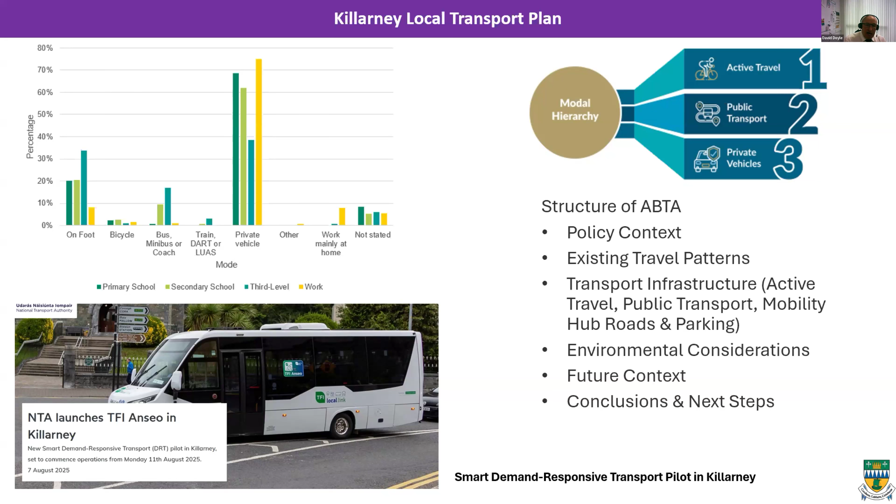So all these will help address the traffic congestion in the town and make the town more active travel friendly. The scheme we just developed last year is the Rock Road scheme, linking from the N22 and the Tralee approach down to the town centre in Killarney.

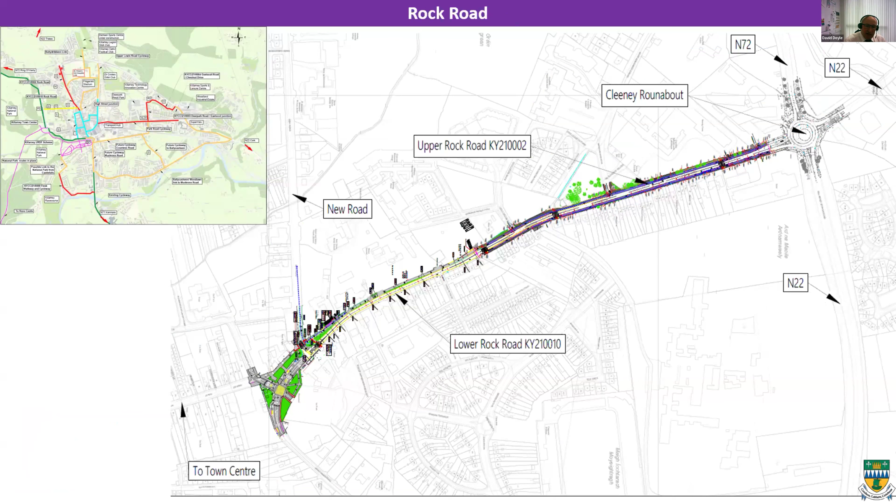It's 460 metres of segregated cycle lanes for the northern part, and then it links over to a combined shared cycle space with junction upgrades at the New Road, Rock Road junction.

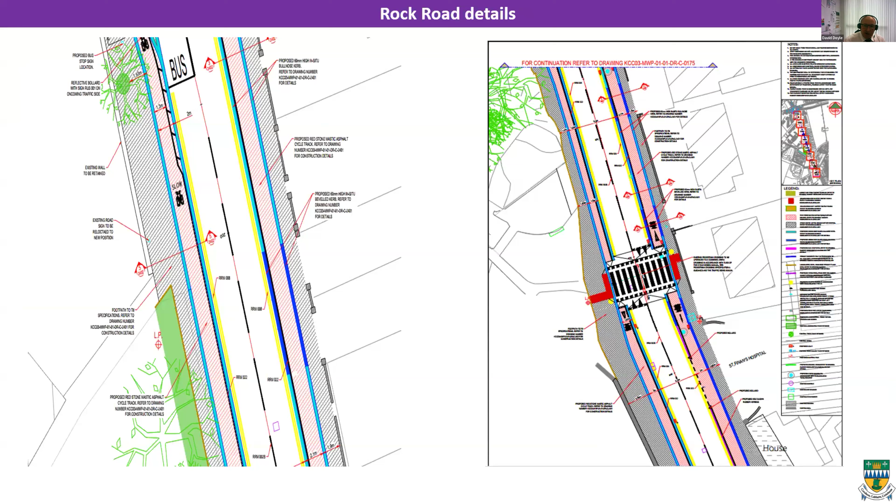The scheme entails two-metre wide cycle lanes on the segregated section heading north-south, with improved footpaths and landscaping, new street lighting, and fully segregated facilities. We also introduced 3 raised pedestrian crossings to provide safe crossings for active travel users, which also benefits significantly with speed reduction, which I'll come to in a while.

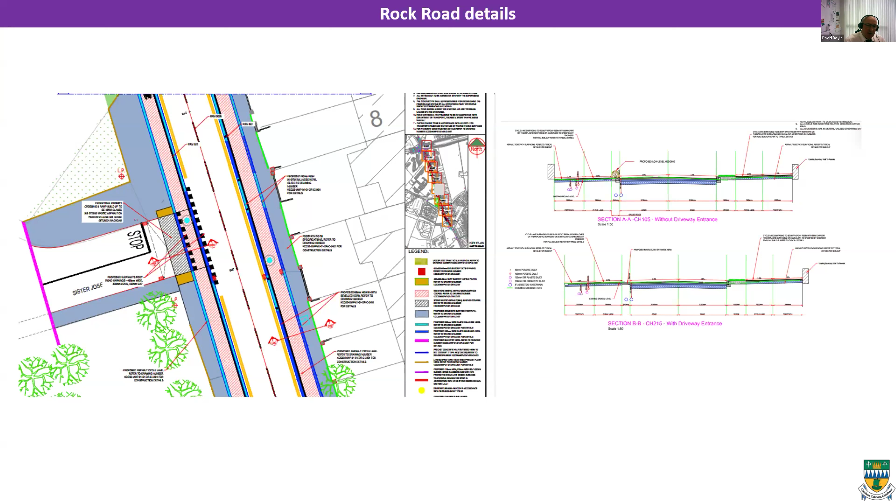Again, 2 metre segregated cycle lanes, with the carriageway reduced down to 6.5 metres. We also accommodated the bus stops - these are 2 online bus stops, all detailed.

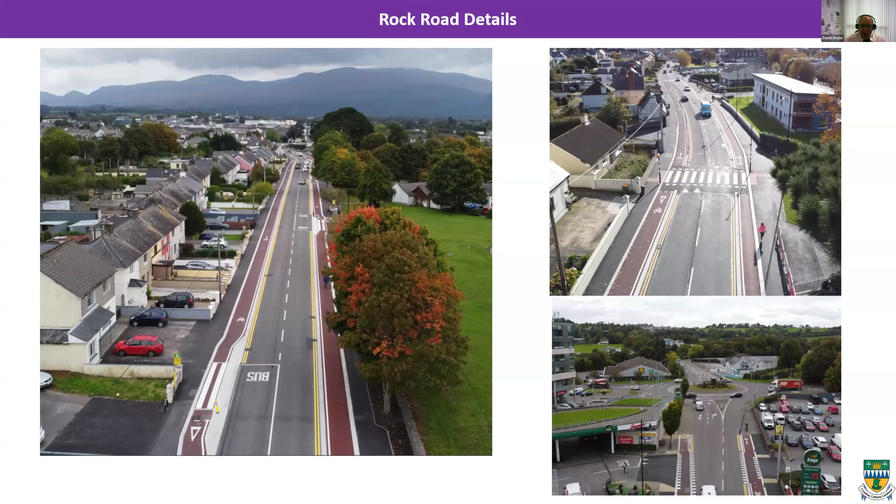On the photograph on the right, you can see the raised pedestrian crossing, and where the scheme ends linking in for the N22 Killarney bypass at the northern end of town. My colleague Paul Curry, working with the TII, has a scheme developed to convert that junction to a protected junction with cycle lanes heading northward to the housing and play areas north of this area.

Photographs during the works - with the curbing in place, which delineates the traffic area from the cycle lane. There's a 60 millimetre level difference between the cycle lane and the footpath. You can see the various stages with curbing installation, the road base, and the red cycling surfacing, which clearly defines the cycling infrastructure.

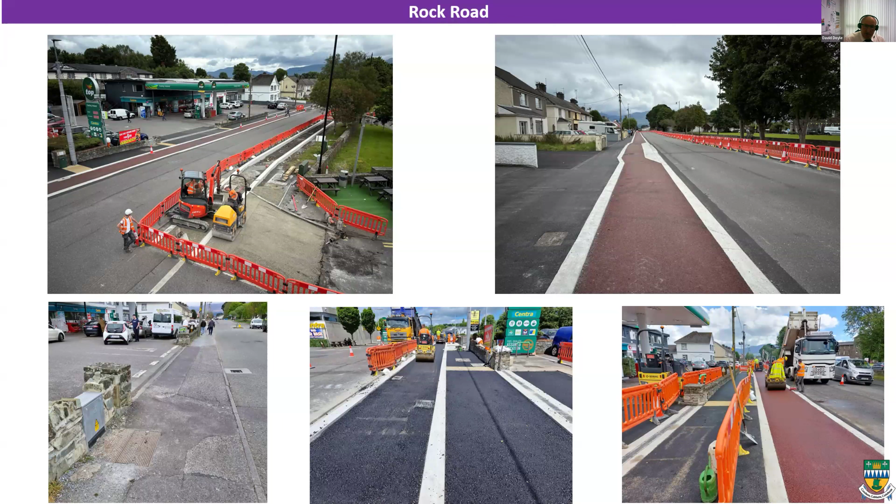Another key point in urban areas is getting the works done to minimise disruption. On the western side of Rock Road, we used slip form curbing. However, on the eastern side, we have a significant amount of house entrances, and you can see in the middle photograph where you're shuttering the curb - that's a very slow, time-consuming operation. So from a design point of view, we should have regard to utilising slip form curbing wherever possible.

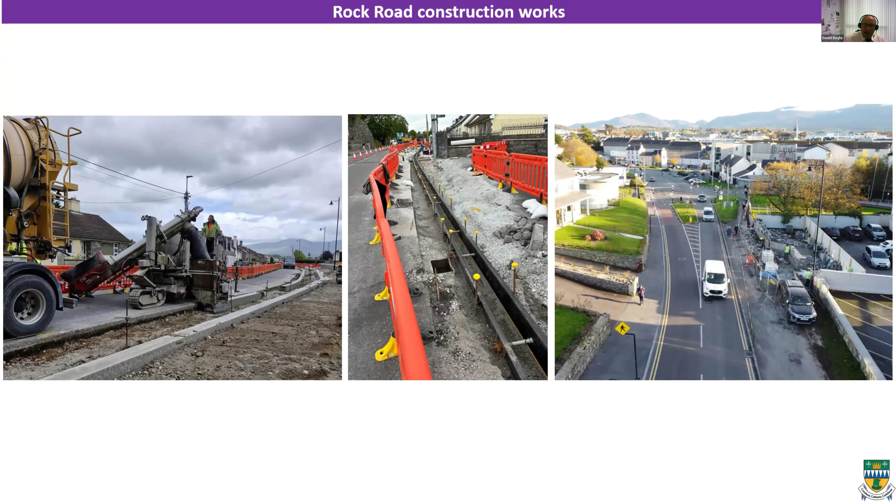Just the last photograph on the right - we had just one piece of land acquisition required. You can see where the old line of the footpath was extremely narrow, and then the finished product where we've set it back to provide a 4 metre clear space approaching that new road junction.

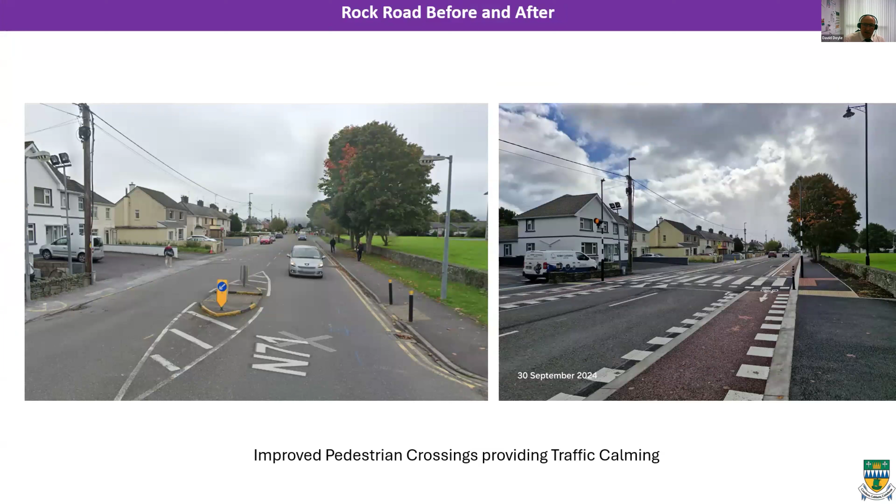Challenges on day one with Rock Road - you can see it's very much vehicle-dominated, a wide Former National Road. Then the photograph on the right shows the carriageway reduced to 6.5 metres with appropriately provided footpaths and sight lines. Initially just uncontrolled crossings, and then we provide raised zebra crossings giving full priority to the active travel user. You can see the vehicle-dominated street on the left, and the improved road network on the right-hand side.

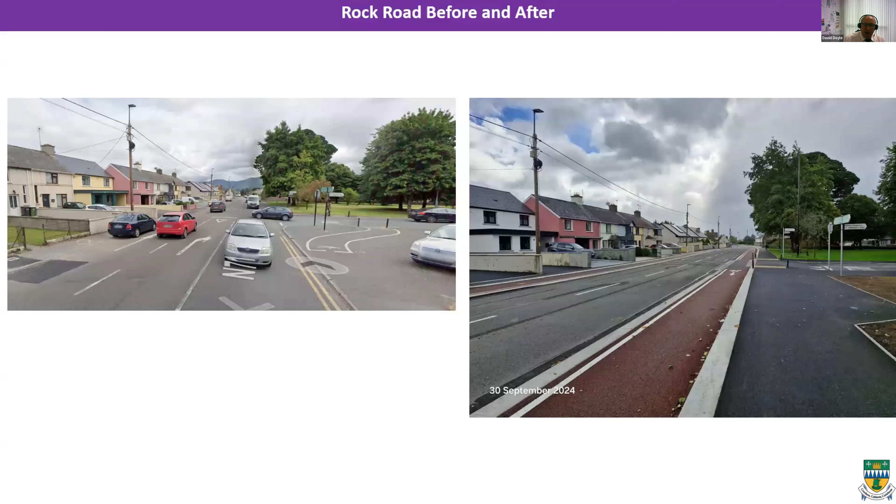As Joe mentioned, these aren't just active travel schemes - there are significant benefits for landscaping, improving the overall aesthetics of the scheme. On Rock Road, we used our own landscaping crews to landscape the project, which really adds to the overall appearance and completion of the finished project.

You can see a very narrow footpath in the photograph on the left, and an improved setback wall on the right-hand side giving full active travel access with a 4 metre wide shared space approaching that junction.

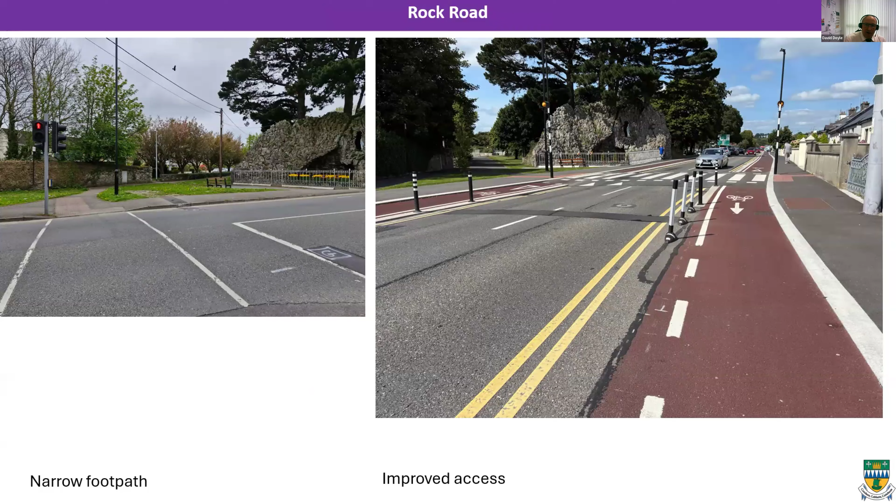Again here, showing the photographs on the left, the before pedestrian crossing, and now the completed raised crossing, giving full access for the active travel user. The photograph on the left is the junction before we commenced - a 2-stage pedestrian crossing with no crossing on the new road element.

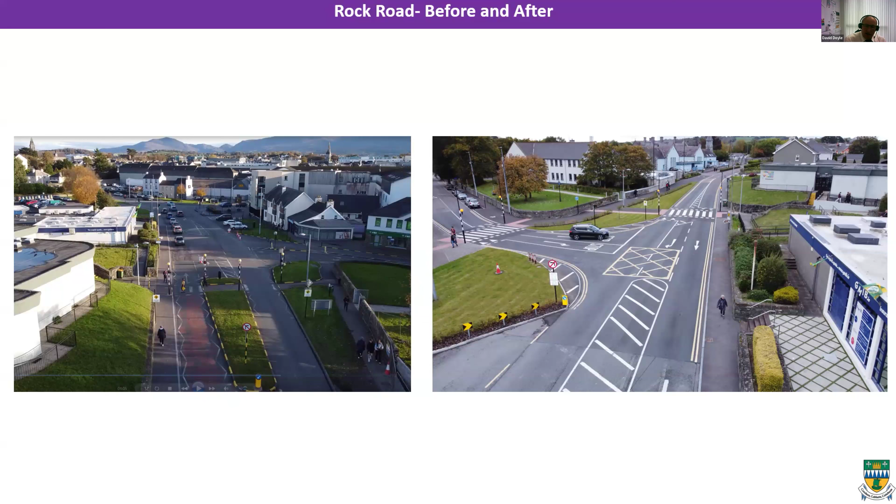The photograph on the right shows the realigned junction with improved raised crossings, giving full pedestrian access for active travel road users. That road leads down to 4 schools, so there's about 2,200 pupils accessing it daily. We allowed for vehicles entering and exiting, with overrun areas and curb radii for buses turning in and out. Landscaping is a key element of these schemes - it isn't just active travel infrastructure we're providing, but we're also improving the overall aesthetics of the area.

Some stats regarding the speed reduction: the V85 before the works was 56 kilometers per hour. With our 3 raised pedestrian crossings, it's now reduced to a V85 of 43 kilometers per hour. So that alone is providing safe infrastructure, but it's also reducing speeds.

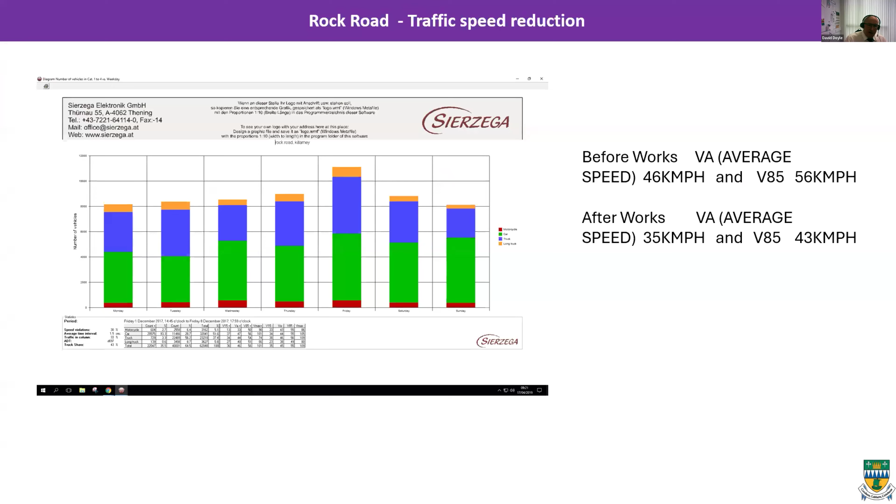We've also put in counters on the completed scheme, and since last March we have 258,000 people who have used both the footpaths and cycle lanes on this road. There's a myriad of data we can gather, and over time we'll hopefully demonstrate there'll be more active travel users on these roads.

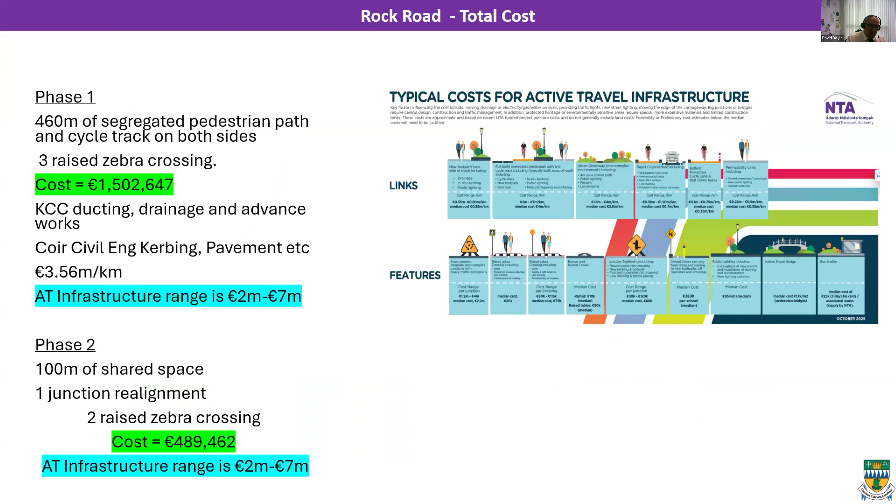Looking at cost per kilometre, our scheme was broken into two phases. Phase one, the fully segregated section, came out at an overall cost of 3.56 million per kilometre, well within the overall average cost of 2 to 7 million per kilometre. Phase two was primarily a junction realignment with two raised crossings, costing just under €500,000.

Our overall team was supported by Tom Ryan, Paul McGarland, and Joe Seamber from the National Transport Authority. Our design consultants were Malachy Walsh and Partners for phase one, and Coir Civil Engineering were our main contractors with Kerry County Council. Kerry County Council did a lot of the undergrounding and drainage works in advance, which took a lot of the risk out of the project. Phase two was developed by our own staff, and the contractor was Michael Lynch Civil Engineering.

Separately, we have a number of our schemes developed. Looking at the map on the top right of the photograph, we're looking at the scheme linking the Muckross Road, which links out to Muckross House in Killarney National Park, back to Ross Road. That was also completed last year, with a 4-metre segregated cycle lane going through the residential area and linking back onto the Muckross Road.

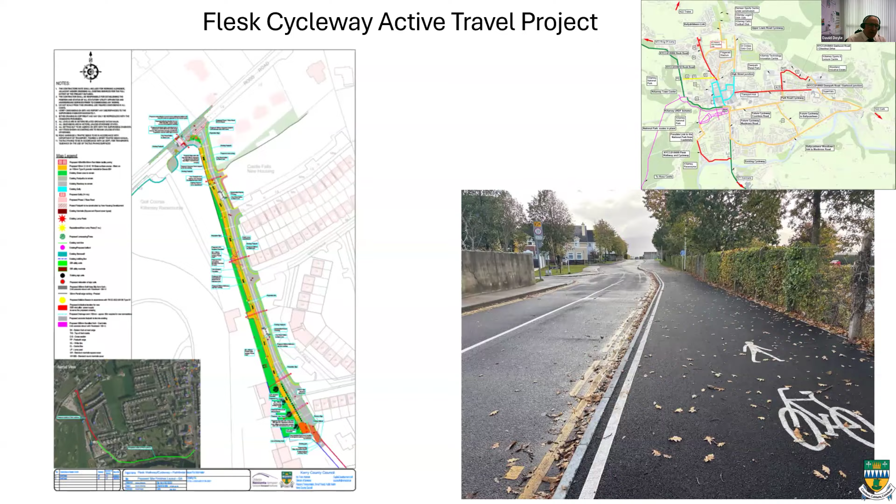We have under construction at the moment the Park Road scheme, entering from the Cork N22 approach along Park Road. This includes a number of pedestrian crossings and a segregated cycle lane. It's currently under construction with the first phase substantially complete by the end of this year. A key element of that project is a traditional train bridge, a very tight point - we will now have a segregated underline cycle lane crossing, utilising an existing culvert under the railway line there.

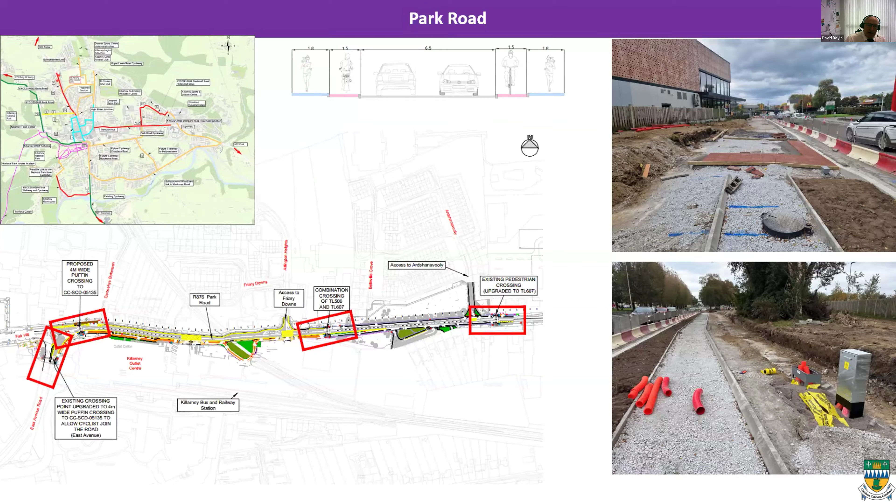We've other schemes planned at New Road, kicking off the planning stage very shortly, and we've schemes planning to head north to link with a lot of the playing areas and housing areas north of Killarney bypass. So I suppose we've a lot done in Killarney, but we've an awful lot more to do. Thank you very much.